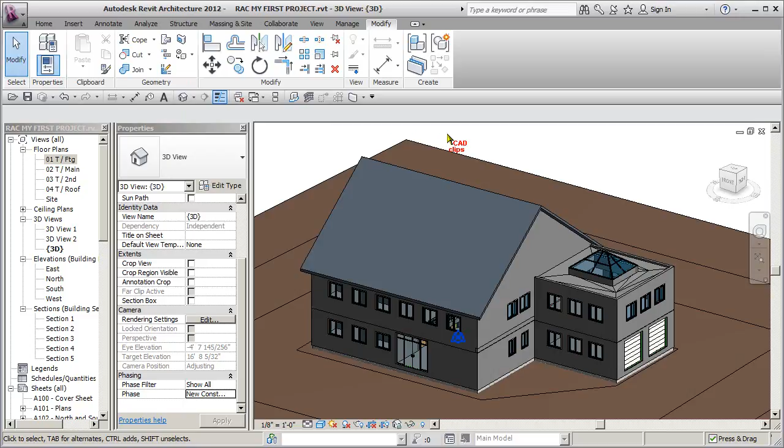I did notice something on my main floor here. When I changed this wall's thickness there, when I used my match type to change it to be a thick wall like this, it offset it, of course, centered. So what I want to do here is I want to pull this off. Okay, so it's not touching anything there. Okay, this end will be okay.

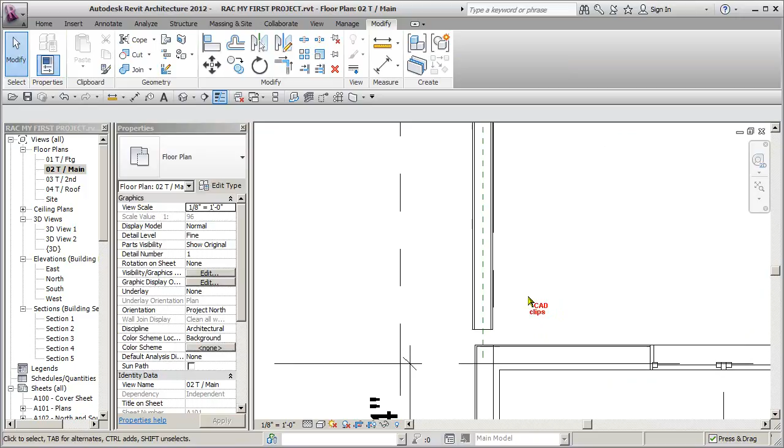And then what I want to do is, and this is going to affect my structural as well as this reference plane, I'll say align to this outside face. Use your tab key if you have to here. Escape on the keyboard, pick, connect this guy back up. Okay, now I need to realign this to this. Escape. Okay, now I need to realign to this.

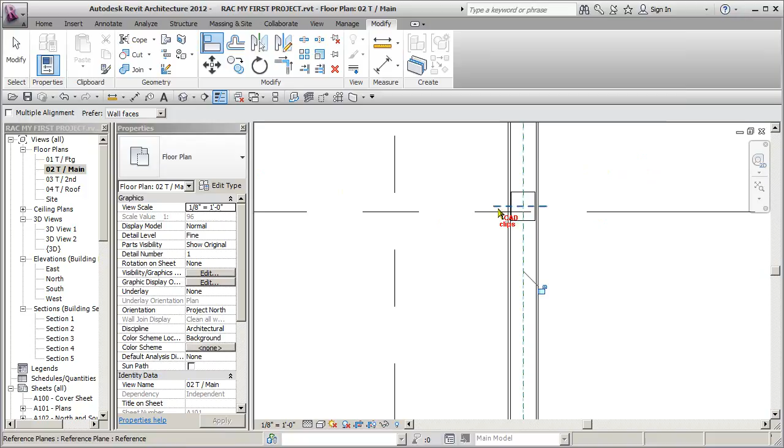Okay, I'm not set to be multiple, so when you do the align, pick the reference, pick the object, pick a new reference, pick a new object. If you want to do one reference and a bunch of objects, that's when you say multiple. Which is what I'll do here, watch. Oh, actually, those don't have to be done. So that's the floor plan there.

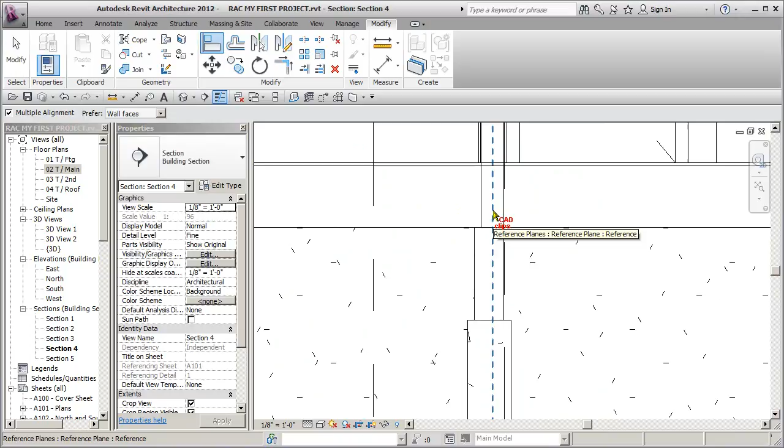Now I need to go to my section. Escape, double click on here. And move that reference plane. So now I need to align. Watch, I'll do multiple. Okay, align to, I want the tab, there it is. Click, then I'll go this and this, right? That's a multiple alignment, and the footing is going to follow that column.

Escape. The wall is okay. How's this beam? Align to the reference plane, this beam. There we go. So a little fix there.

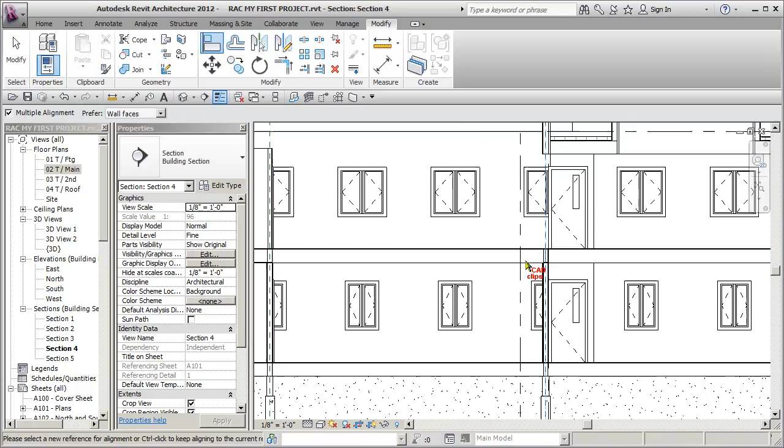Now, in a plan view or in a 3D view, it doesn't matter. When you look at where walls intersect, when they wrap and they intersect, they connect and they compare priorities, functional priorities, and also materials. They join quite nicely if they're the same wall type, and it really depends. So if you click on here, you can see there is one wall and there's another wall. Really what it's doing, it's butting one up against the other.

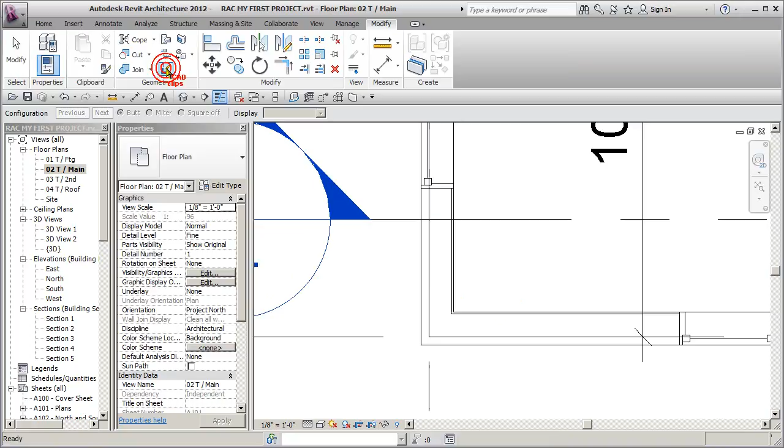If you go to here and you say wall joins, if you hover over here and then you pick, it's going to show you where that join is taking place, and it's making a butt joint. You can say next and it'll go the other way. Next. So that's just looping back and forth. You can also say miter and it'll put the joint across diagonally. Miter, doesn't like it.

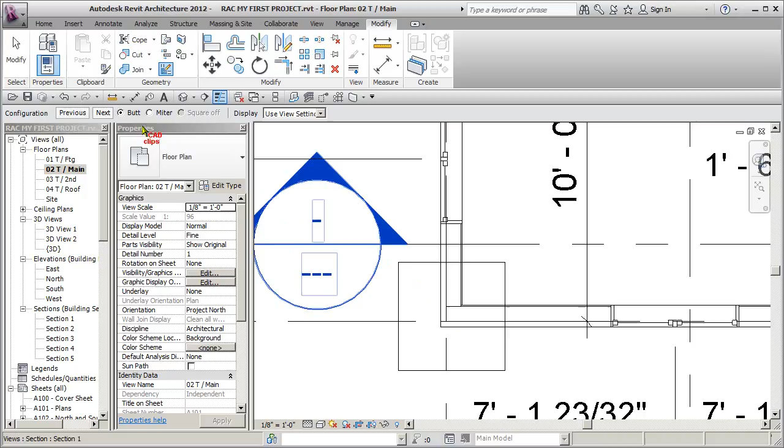Next. Let me just try clicking out here for a second. Click here, click back here again and say miter. Doesn't want to do a miter joint there. Isn't that interesting? Pick on here, miter. There we go. That's what I want, right?

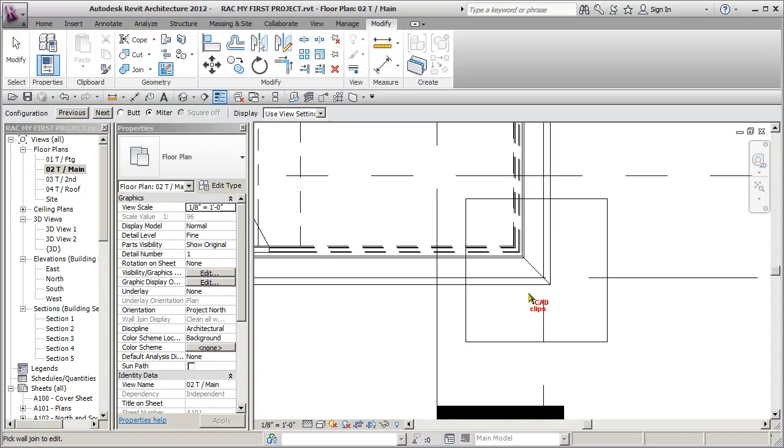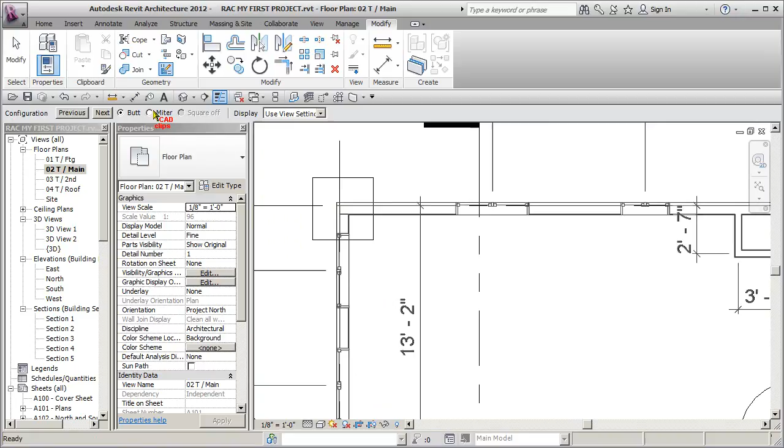You don't see the joint, but that also affects how it looks on the outside and how it connects with the walls and floors above. So you will probably have more success with a miter joint at the corners. And I'm not sure why it won't do a miter joint there. This one is okay as a butt joint, right? These are okay as butt joints. But these corners, quite often, you want to make them miters.

Not liking the miter on that corner. Click on here. Having no problem on this end. No, it doesn't like that one either. Now, let's see if it's because the base extension offset is -14. Let's pick on here. Base extension offset -14, top of main up to 8'10". Okay.

They seem to be very similar. The other thing I noticed, these windows changed. I'm going to go back and use my match type and fix these while I'm here.

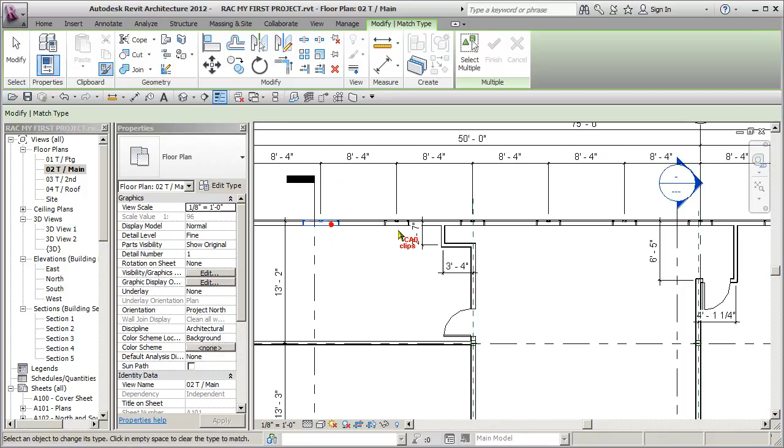Not sure when that happened, but these guys change sizes. So you do have that, okay? And that also works in 3D. If you go to 3D, and it affects what happens. You see that could be part, you see it, I could expect it to be a problem here.

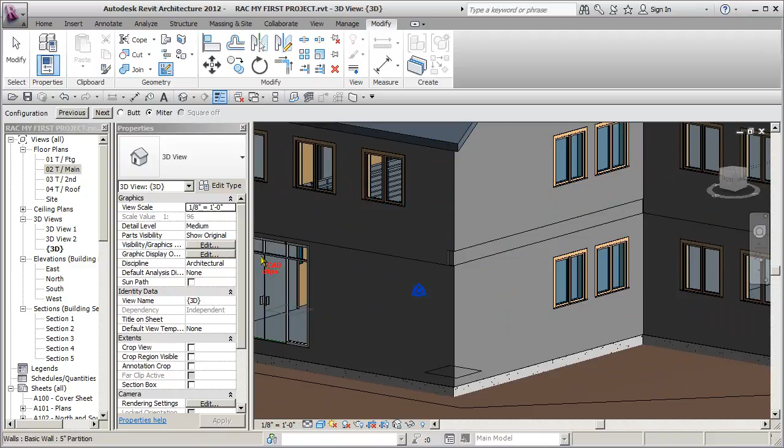What you do is you hover over here and click, and then you get the same option, miter. Now shift middle mouse button, pick over here, pick, because it's a looping command, you don't have to start it again. Does not like the miter on there, letting me only do one cut.

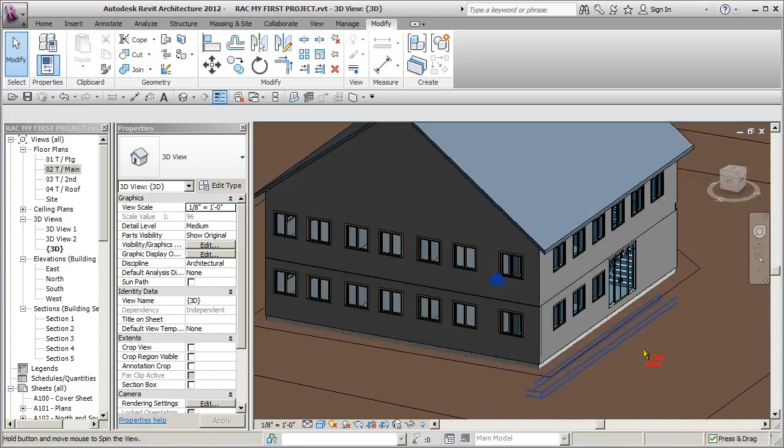Oh well. So that will also affect, you see what's going on up there? You see there's that little kind of notch in there? That can be fixed two ways.

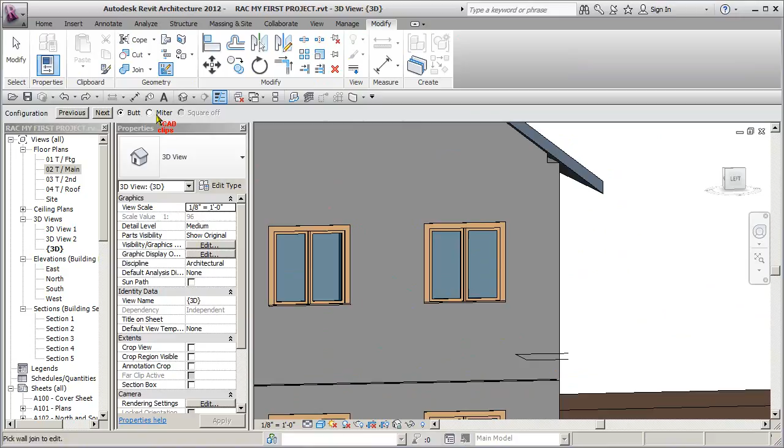You can take that, okay, and say attach to here, and that will solve the problem. And you can also usually solve that with a wall join, then you hover over this intersection and make it a miter cut, and it'll fix it, because the gable wall ends up providing that joint for you.

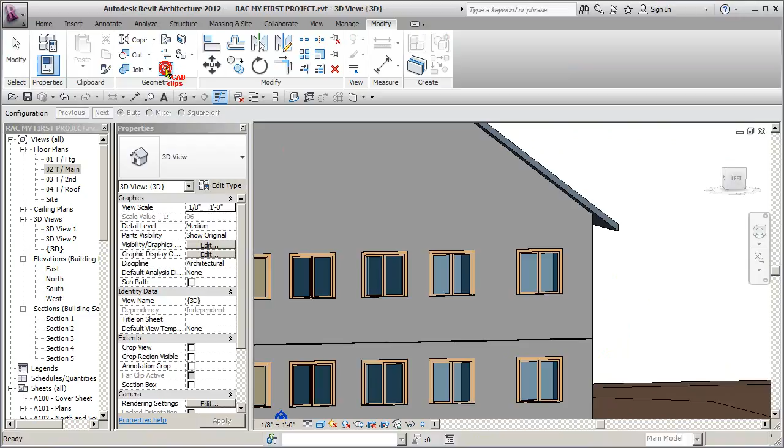And then if you look from in here, no, you can never see that. But so that's two ways to solve that problem. One is with a corner wall join, and then you hover, and you'll see as you hover, you'll get to different intersections. So quite often the exterior ones are mitered.

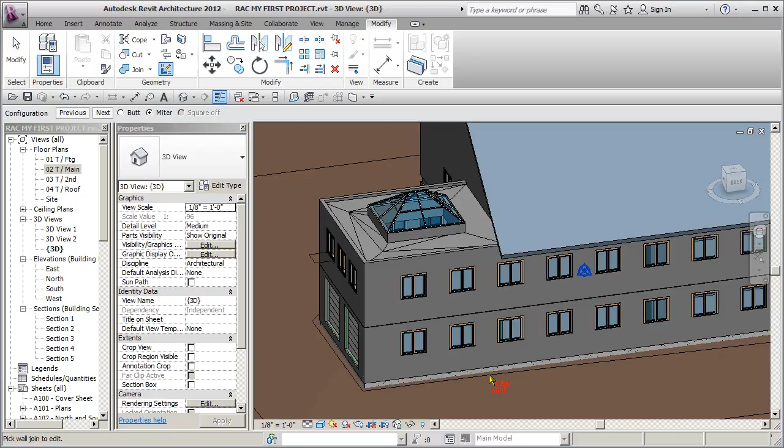No luck. Up there, no problem, miter. Over here, click on here, miter. Okay, so specifically for walls, if you go back like I did over here, if you want to relocate a wall, if this wall is for some reason offset, okay...

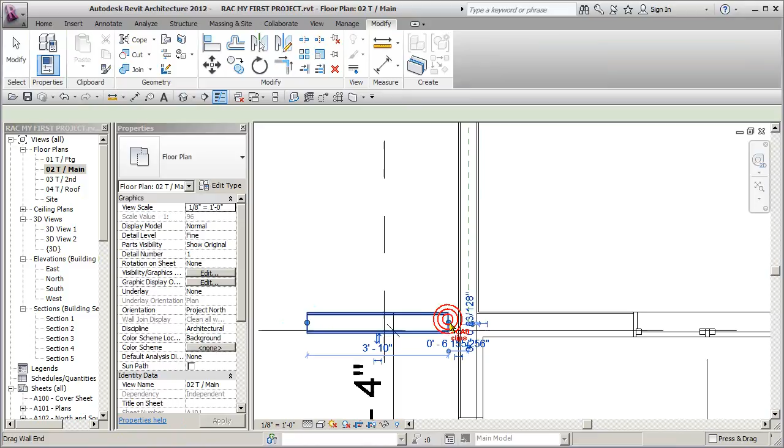Let me draw a new wall. Let's say I have a wall, I'll give me one of these, and I'll pick on a new wall here, and I'll kind of purposely make it off. Now this gets attached. It's going to do its join and everything, but I wanted it the same as this one.

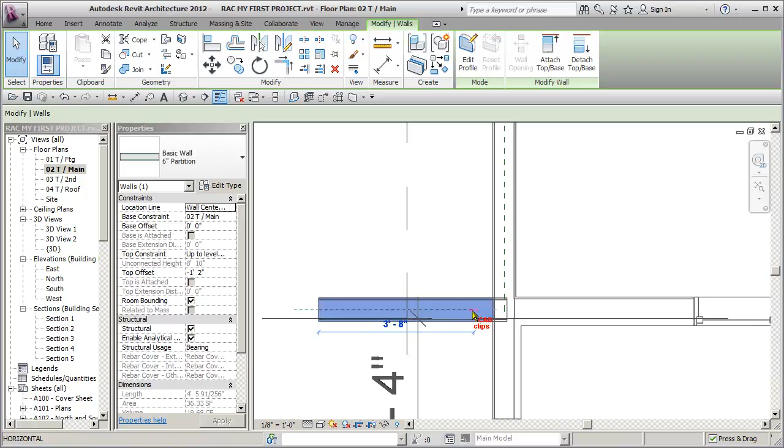What happens sometimes is when you go to move this, when it's attached at both ends and you try to realign it, it'll actually move the adjacent wall with it. It does funny things. So when you want to move a wall at an intersection, pull and use your shift key if you have to, pull the wall off both ends, free up both ends, then take it and do your alignment or your movement.

Then you go align to here, this, escape, then pull it back. Okay, that's tip number one with corner joins and wall joins.

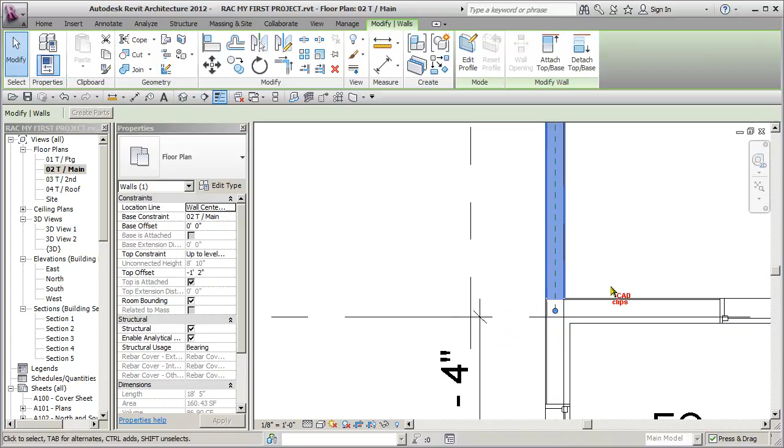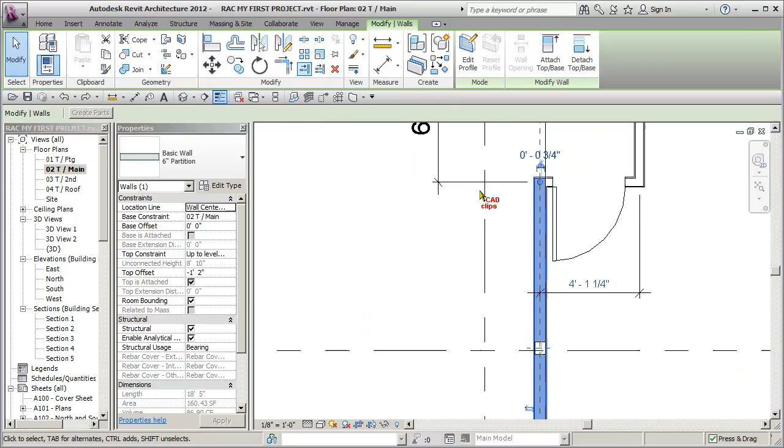Don't try to move this wall, or when this guy was slightly offset, because if you try to move this wall, quite often, and it's not right now, but when you go to move it, it'll do funny things over here. So that didn't do anything funny at that point, but pull the wall off even at both ends. Sometimes if it's giving you trouble, move it laterally, then stretch or trim your walls back again is the best way to fix that.